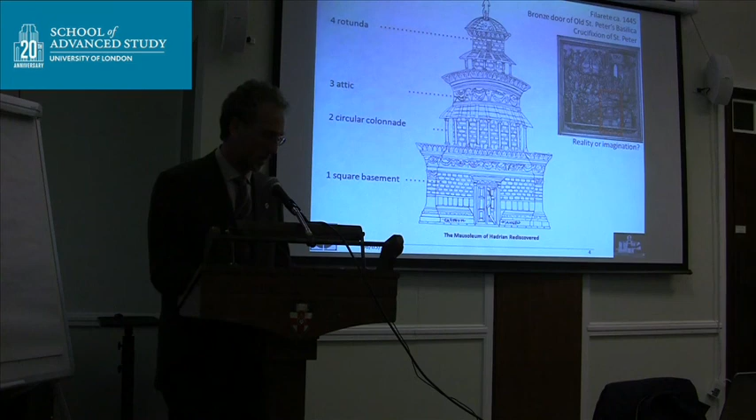These are some of the proposals we can find in the literature. There are so many reconstructions about the mausoleum - really, we don't lack fantasy in these reconstructions. Beginning from the one by Labacco, dated 1552, very early, when the first studies on Roman architecture appeared. Labacco wrote a book that was very successful about the monuments of Rome - maybe it was the first one.

Then there are others, up to Hulsen and Borgatti, at the end of the 1800s, early 1900s, when they proposed a more scientific reconstruction. Then in 1925 appeared a very nice article trying to go through the architecture with very good observations.

Regarding the interior, the reconstructions are treated with more fantasy, beginning with Piranesi - he just invents everything. This is quite notable, because Piranesi is always a very good source for observation on ancient monuments. In this case, we clearly understand that he's not understanding the original structure, and most probably this has to be related to the fact that it was a castle, and he could not look very well at the details of the construction.

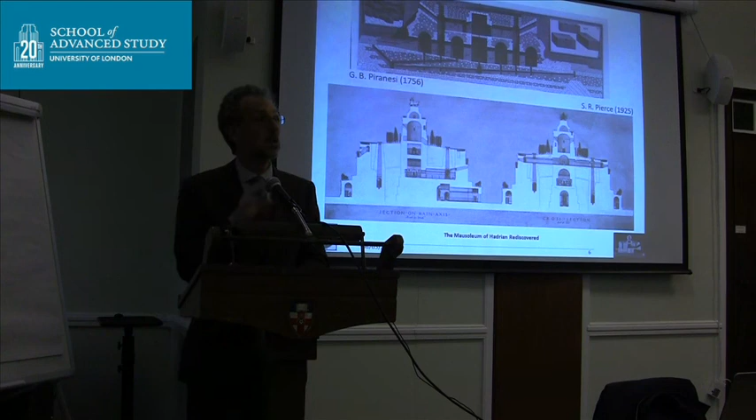So, the point is, let's go through its architecture. We know that there is a foundation that is 7 meters deep. This is made of concrete, like the usual building technique in Rome. Above this was built a kind of boundary wall made of concrete faced with brick.

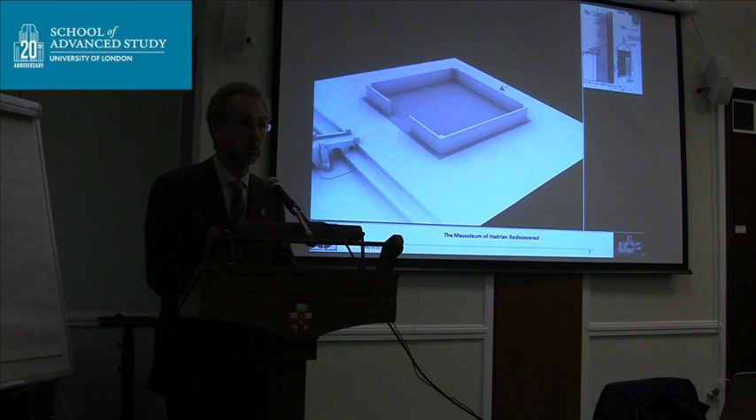This boundary wall, I suppose, was built just to limit the area where the mausoleum had to be built and protect it from the floods of the river. That was a major issue in Rome, as you know. And then there is the first part of the circular construction that is within the square basement.

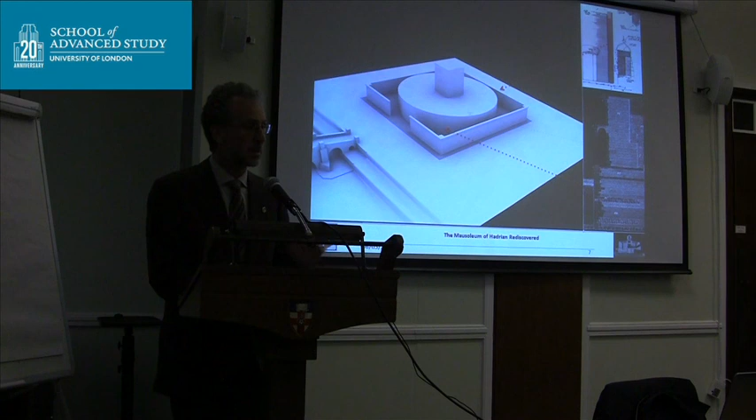And above this, at the very center, we have a tower. This tower has inside the burial chamber. Around the tower, there was a kind of first ring of concrete that was larger, and then a thinner one, another ring of concrete. All this was needed to keep the filling of earth that was between the tower and the outer rings. On the very top, there was this rotunda.

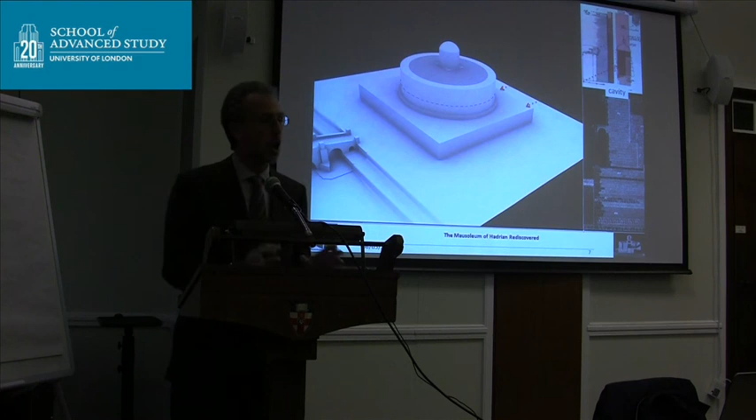Finally, there was the exterior construction and the roof construction that was made with ashlar masonry. And as you see, there was a cavity between the boundary concrete wall and the outer ashlar masonry. That is the very famous one that is drawn in the Renaissance, and we know much information about the decoration. All this stands inside the present-day castle.

Regarding the interior of the mausoleum, from the entrance there is a spiral ramp that goes up and leads to the level of the burial chamber that is placed exactly at the very center of the construction. And then there are some air shafts that are needed for the ventilation of the ramp.

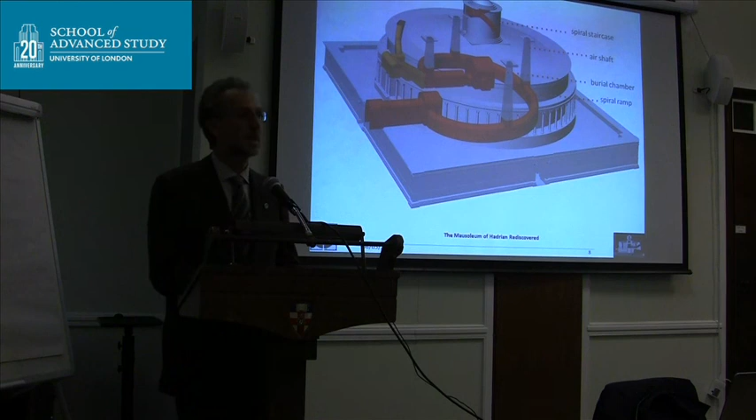And finally, on the very top, there is another itinerary within the rotunda that is also preserved. That is the one that goes on the very top of the rotunda. All this, the red one, is still preserved. What we don't know is the part that is highlighted in yellow. And we will get to this very soon.

So, the entrance corridor ends with an atrium, and from the atrium it is possible to go up through the spiral ramp, and there are the ventilation shafts. Up to this moment, everything is very clear. We can clearly see the Roman structure and understand how the original architecture was. Once you get on the upper level, things are a little bit more difficult.

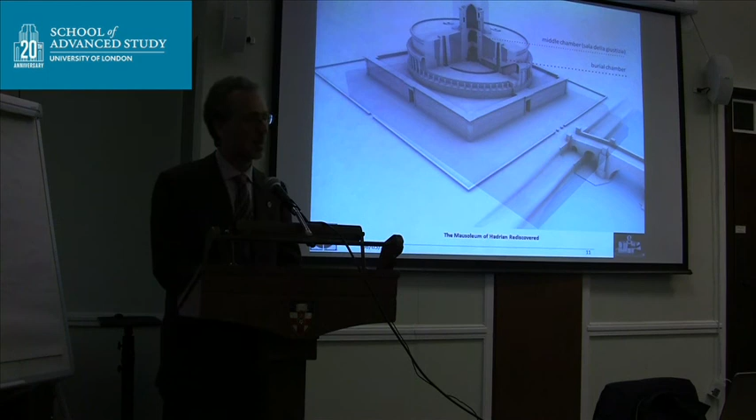We have, of course, the burial chamber that stands in the inside. You can pass through it, and it's very clear. It's a square construction. Above this, today there is a kind of middle chamber that was reused in the castle, but it was a room that was not accessible. And then finally, on the top, there was the rotunda.

The very critical point is what happens when the spiral ramp gets to the end of its itinerary. It arrives to a place that is highlighted in the square red part, and above this area there is an air shaft similar to the others, but with some very important differences.

As you can see in the picture, there are some kind of recesses, indentations in the masonry. It is ashlar masonry, but this is not travertine like all the other parts built in ashlar masonry in the mausoleum, but made of white marble. This is very special because marble was used in the mausoleum only for architectural decoration, not for construction. So this gives evidence to something very special.

If we look to the indentations, we can clearly see the holes of the dowels. That means that blocks of marble were removed at a later time to be reused. So the original architecture of this place was rather different from the one we see today when we enter inside. This is a picture that shows the present-day condition.

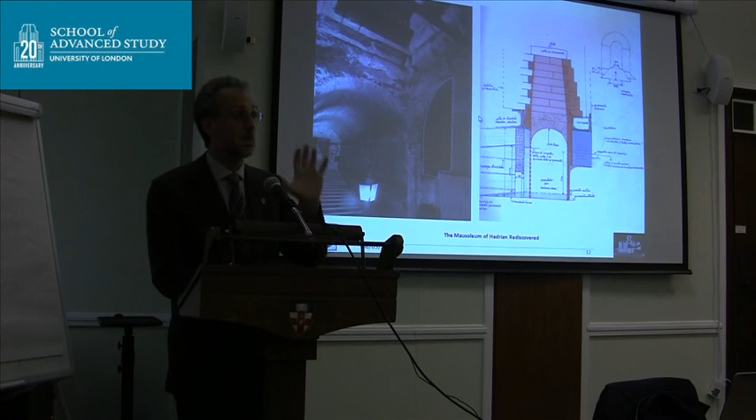However, this is not possible because this opening, if you see here the blue part, the lower part here has concrete, so it is quite impossible to continue with another ramp in this area. And there are also above, all around here, the imprints of the ashlar masonry that was removed.

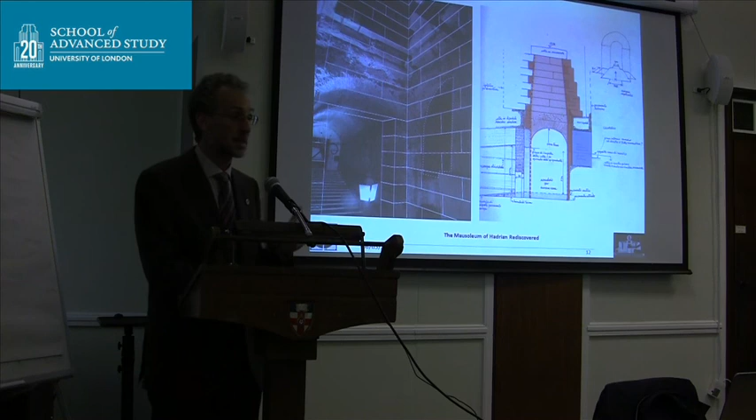So what comes out? It comes out that in this area there was another vestibule that was all built with marble ashlar masonry. That was the end of the itinerary coming from the entrance and reaching a very important point. This point was exactly the point that on one side you could go through to the burial chamber, the red part that is highlighted there, and the burial chamber is this one highlighted there.

So from one side you could go just in this direction, but then comes the point. What happened? You could not follow this part to go up, so we have to look for a continuation of this itinerary. This is the crucial point where all the people who have dealt with the mausoleum have tried to find a solution that is absolutely crucial for the understanding.

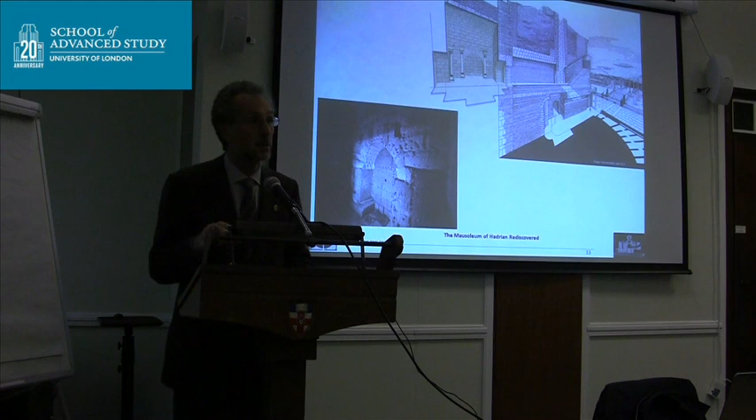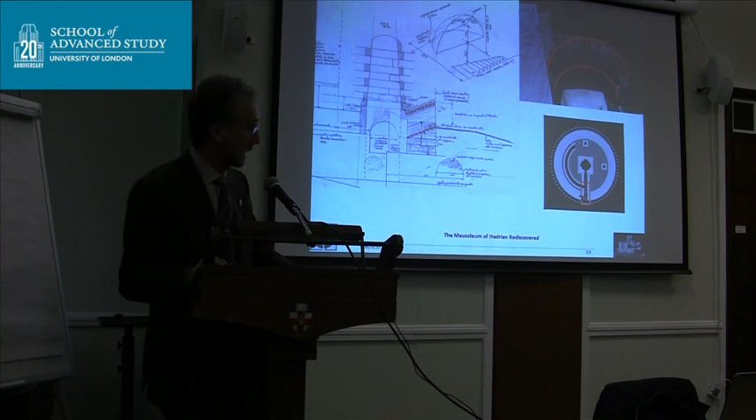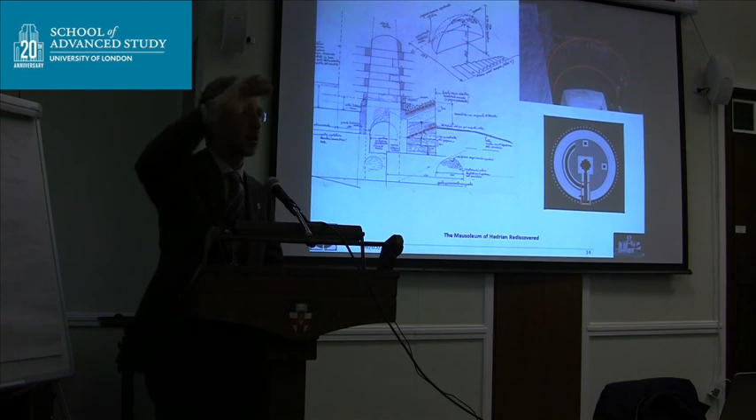If we look on the opposite side to the corridor leading to the burial chamber, we can see that there is a kind of barrel vault construction. This is inclined. It goes towards the outside of the mausoleum and has an inclined impost. So it's a kind of inclined corridor going outside. And more, we have even another important evidence: here there is a kind of niche that was excavated sometime later, where we have evidence of a step.

So one of the critical and difficult points for the understanding of the mausoleum is very clear. There was a marble vestibule at the end of the itinerary leading to the place where you could go either to the burial chamber or to the upper part of the mausoleum. It was a vestibule of particular importance in the architecture because it was the hinge of all the system. From one part, you could go where the dead emperors laid, and in the other part, to the temple that was dedicated to them. So this is one of the points we have reached.

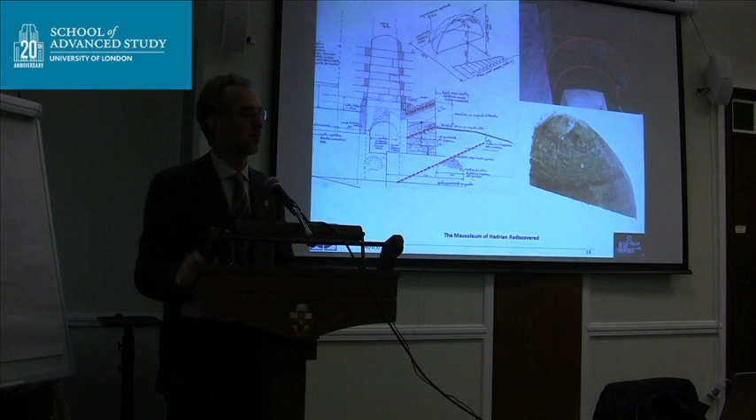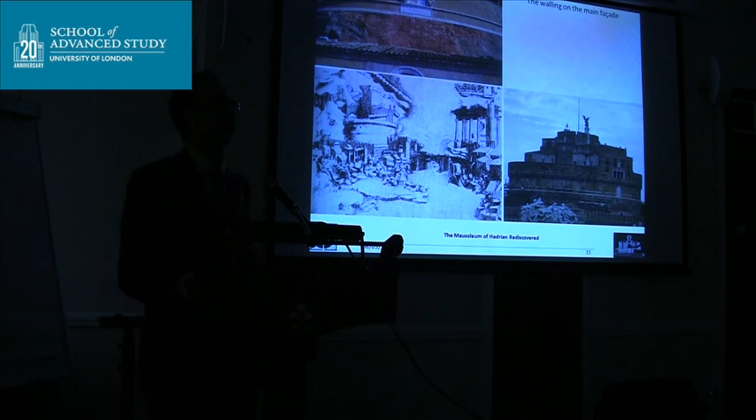However, looking at the outside of the mausoleum, there is, maybe we could turn off some of the light here because I see that maybe some images are not very clear. I think we'll need to leave the lights on for the filming. Oh, I see, okay, perfect. No, that doesn't work. Much better for us. Could you turn, I think it will destroy the film. Okay. Oh, I see. But it's not possible to just light the part of. Okay. That's too much. I'm sorry for this.

But I can show here, on the facade of the mausoleum, there is something that was not noticed. That is to say, if we have an inclined staircase going outside, of course, the Roman masonry is not existing. There was a kind of passage. And if we look at the present-day masonry, we clearly see that there is a walling of an opening that was made in later times. This is very clear when you go there.

And especially, it is very interesting to see, this is one of the famous drawings that were made by Ghirlandaio and Giuliano da Sangallo. They are two similar drawings that show the mausoleum as it was in 1492. It's a very interesting source. We can see here in this side part of the original ashlar masonry marble cladding of the square basement that was removed and covered after the interventions of Paul III in the 1500s. But what we see here is a detail that is very interesting.

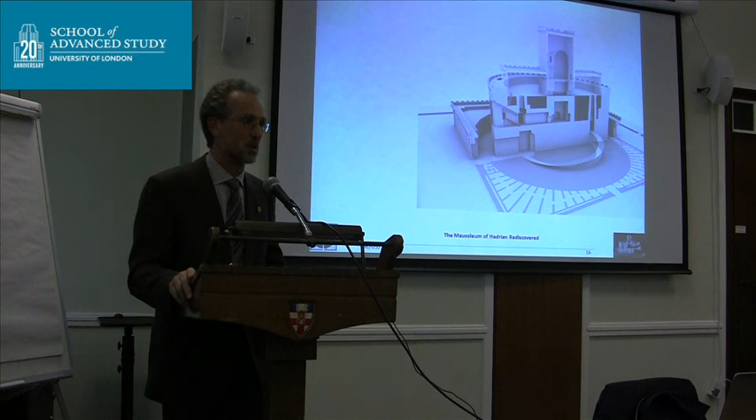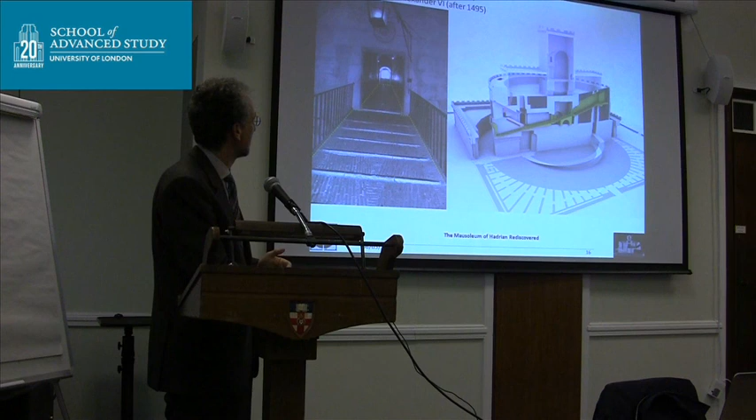All this was completely modified under Alexander VI at the end of the 1400s, when he made major works in the castle. All of you supposedly have been in Castel Sant'Angelo, and at a certain point you get to this diametral ramp that goes from one side to the other of the castle and breaks the funeral chamber, and you don't understand what's going on. It has modified the original layout in a very strong way, and this makes the understanding even harder. But this modification made the staircase built by Boniface IX useless.

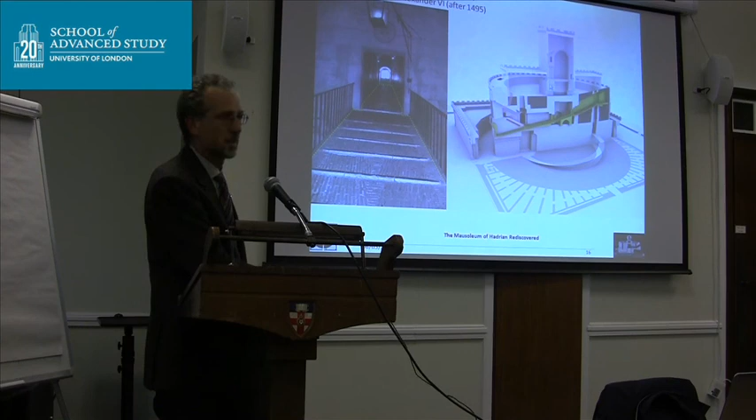And today, when you come from the spiral ramp or from outside, you go up through this ramp and you reach the top. But this was not the original. Coming to the upper part, I said that there was a kind of middle chamber just above the burial chamber. It has been suggested that it was another burial chamber. This is impossible, because there is evidence that this passageway and the one opposite that give access to this room have been cut into the Roman masonry. The yellow ones are headers and stretchers that have been demolished to create the passageway. So originally, this room was not accessible.

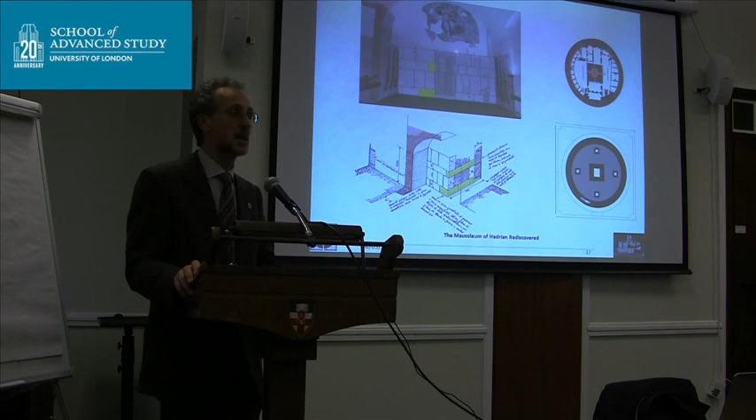There was an ashlar wall all around, and it was covered by a concrete barrel vault. This concrete barrel vault was most probably built and made inaccessible, that is to say, the scaffolding and the centering were left inside. The level of this chamber is this one, that is the courtyard when you reach the top of the castle. Originally, the situation was really very different. As we can see, here is the chamber located in the middle of the structure, and all this was filled with earth. That is to say, it was a part that was remodeled with the transformations of the castle.

What was this middle chamber used for? My suggestion is that it was created to raise the rotunda to a level that made it possible to be seen from the opposite side of the bridge. And here we come to the point that the bridge and the mausoleum were built together, as part of one project. Today, here, we have in red the mausoleum, in gray the castle, and the parts that match red and gray, this violet color, are the parts that survive from the mausoleum. As you can see from the reconstruction, the mausoleum is preserved up to the top.

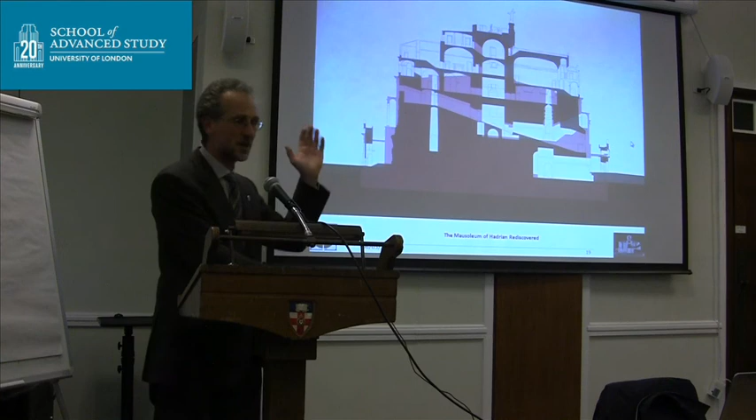upper vault, the dome that was on the top of this, is not the original one, because in 1497 the thunder struck the tower, and it exploded because there was gunpowder inside. This is like the Parthenon. The history is always the same. But this time it was God, and it was not Morosini to do that.

And so, we are now, I suppose, quite familiar with what happens inside the mausoleum. But what was the outside of this construction? In the outside, we can clearly see that in the lower part of the castle we have all the Roman concrete, and there is a small part of the original ashlar masonry that was a kind of construction enveloping the concrete construction.

We can clearly see that there are differences in the treatment of the masonry and of the concrete, but the most important one is this one. In this level, we see that we don't have remains of the stone wall. There is only concrete without any imprint of the stones that were removed. And this is absolutely important, because it gives evidence to the existence of a colonnade around the lower part of the mausoleum.

You have to think that present-day concrete structures, Roman structures, get to this level. But the upper part is not visible, because there is all the brick facing made by Alexander VI at the end of the 1400s. What is clear is that in this side, the lower part of the rotunda was at this level, while in the upper part, above this layer of travertine, it is recessed.

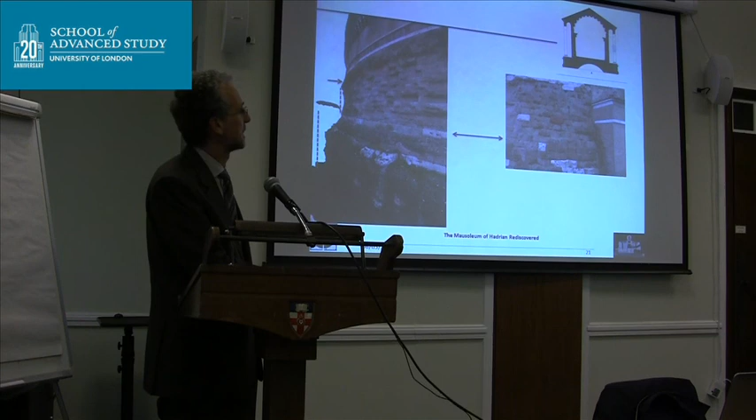So what comes out is that at this level, there was a barrel vault coming out that is very similar to the Temple of Hadrian in Campus Martius, where there are the columns that are still surviving with the vault above them. So it was a very similar layout.

It's interesting to see that there is a very nice drawing in the Galleria delle Stampe of the Uffizi Museum in Florence, made by Sallustio Peruzzi. Sallustio Peruzzi was the son of a most famous architect of the Renaissance, Baldassare Peruzzi, famous also for his projects for St. Peter's, among others. Sallustio Peruzzi made this drawing that is very interesting because it's a kind of study reconstruction of the mausoleum.

And this doesn't show the upper part of the mausoleum, but clearly shows all that we have been saying: the spiral ramps, the colonnade, and the system of the square basement. Unfortunately, he didn't suggest what was going on the upper part. And Antonio Labacco, who was a pupil of his father, was, as I said earlier, the first who published a book on the reconstruction of Roman buildings in 1552, and it was a very successful book.

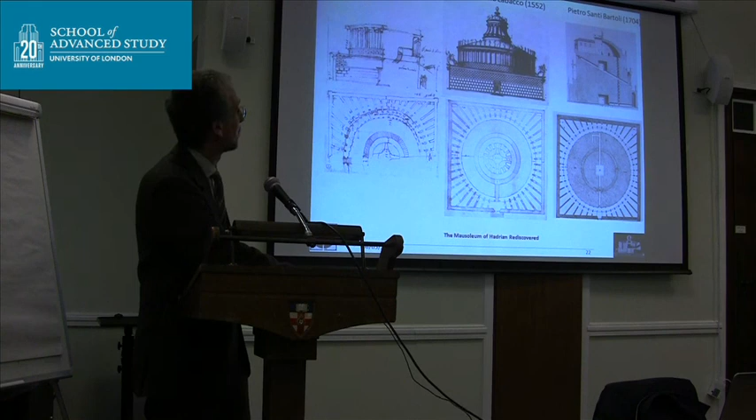It was printed and was all around, but as you see, it's clearly inspired by the drawing by Sallustio Peruzzi, but in the upper part there is a lantern. This is St. Peter's, it's not a mausoleum, of course. So this is important because this is the beginning of a period of reconstructions that are made based on fantasy.

Very fantastical is the reconstruction of Bartoli, who imagines something like a dome construction on the very top, a kind of spiral staircase to go up, and so on. And there are others and others and others. And the memory of the mausoleum was completely lost.

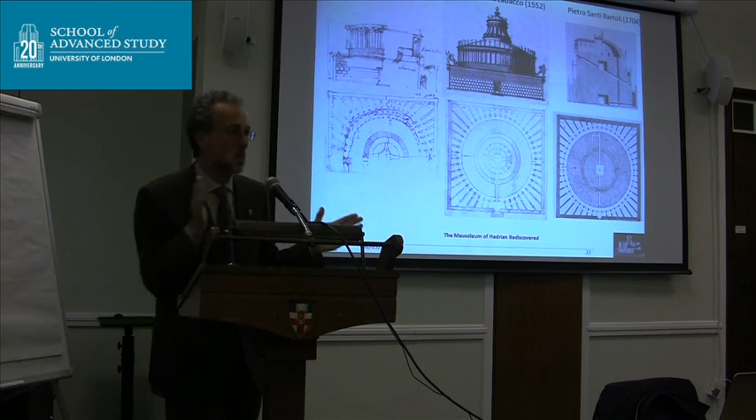And I suppose that Sallustio Peruzzi had evidence from other architects from the 1400s who knew much more than what was visible after the modifications made by Alexander VI. So Alexander VI is the one who creates this crack in the history of the mausoleum, and since then we lose information and understanding of the mausoleum.

So this is today, and this is how it was. At least this is my suggestion. As you can see from this reconstruction, seen from the close side, not the front view, the rotunda is a little bit hidden by the attic that stands above the colonnade, because the rotunda was very little, and above all, it didn't have a colonnade around.

I could prove that because I found evidence inside the modifications made by Paul III of one of the foundations of the rotunda, and there is no space to create a colonnade that would need a foundation that doesn't exist. So the rotunda was like a very simple round building, and this excited very much Filippo Coarelli, of course, as in the Pantheon.

So it's a project where since the beginning Hadrian wanted to add at the very top of the building, of his mausoleum, something dedicated to the cult of the emperors. And this is the big difference with the program made by Augustus some 140 years before.

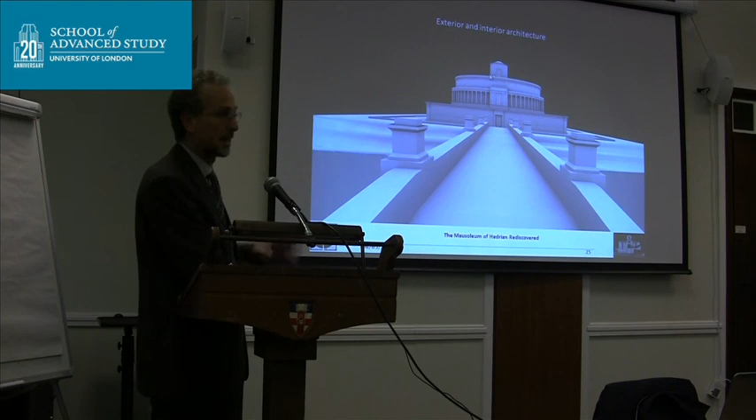So it is most probable that here on the first story we have a volume coming out and highlighting the presence of the false door. Inside this volume, we have to imagine there was the staircase leading to the top. So this was how the mausoleum looked from the opposite side of the river. And as you can see, the rotunda was visible in its entirety, exactly since it was given a higher level than the cornice of the attic. This is the reconstruction, and this is the section.

So, one thing that is very important to highlight is that the funeral chamber was not placed at the ground level like all the monuments and mausoleums we know. It was placed at a higher level. This was possibly for a practical reason, against the floods of the river. We know in the Mausoleum of Augustus there were problems dealing with the floods of the river. But it was also inside the concept of the construction.

The concept was that you could enter inside, you had a spiral staircase going up. This spiral staircase has no relation with the exterior. So when you go through this spiral staircase, you lose your orientation. You don't know where you are. As in the Mausoleum de la Chrétienne, there is the same spiral staircase, but that is on one level. In the Mausoleum of Hadrian, since it goes up, you also lose reference in the height. You are out of the world. You are in an inner world.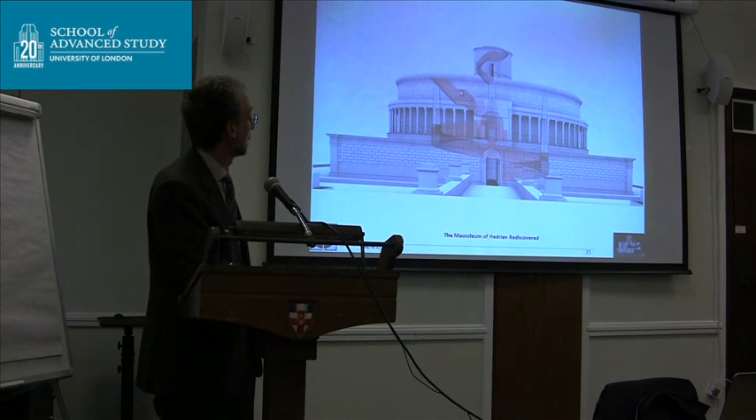From this, you could go up, always without facing the exterior. So it was a kind of interior itinerary without contact with the exterior. And only once you reached the very top, you could see the rotunda. That was the place dedicated to the cult of the emperor. So we reach the conclusions.

The first conclusion is that, as we saw in the drawing, the reconstruction made by Filarete in 1445 was correct, apart, of course, from the upper colonnade that was here. But in 1445, they knew exactly what the original layout of the mausoleum was. The second is the hypothetical location of a volume in this area that was useful for the itineraries, but also for the false door in the main facade.